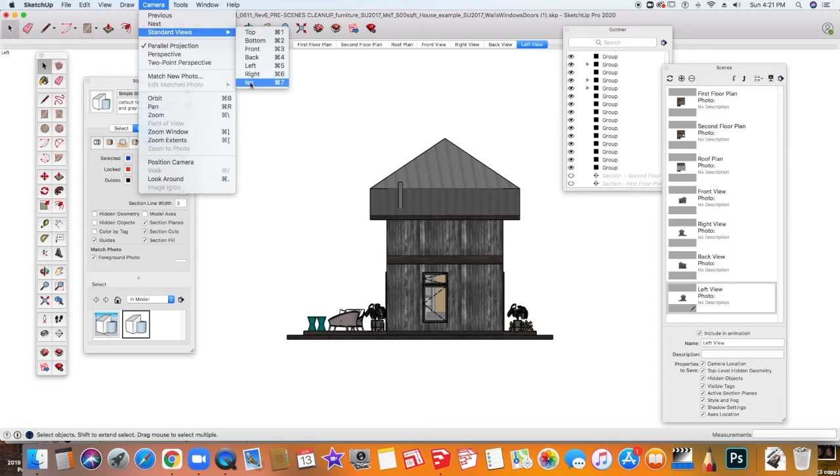Now that we've completed the roof plan, the 4 elevations, and our first and second floor plans, it's time to create some of the perspective views that we're going to be using. There'll be 2 3/4 perspective views and then also some interior pictures. So to start that, we're going to go back up to the camera and click on ISO.

That will put our model into an isometric view, which basically means there's no vanishing point. This is a stylistic feature used by architects sometimes. For our purposes, we're going to want to use perspective. So we're going to go up to the camera again and click perspective, and that'll probably look a little bit more normal.

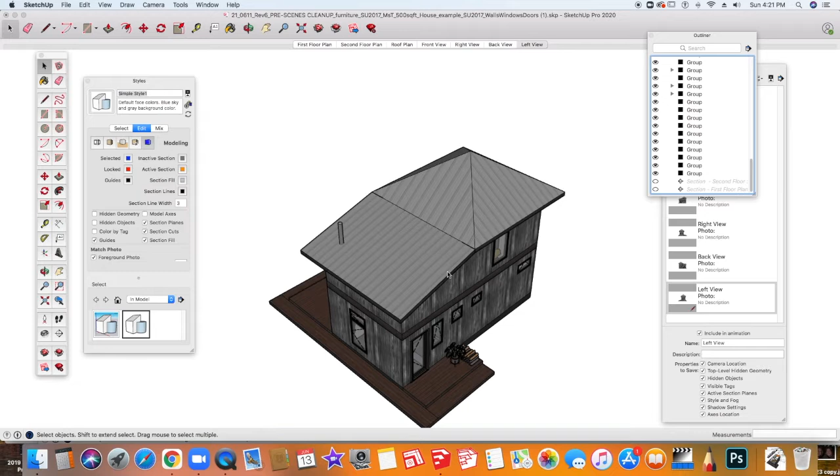We're going to want to have a 3/4 view, which means that we want to see 2 sides of the building. When you do this, you may want to do it as if you're standing in front of the house and approaching it. So I'm going to pick my front door and my left side, and set that scene up, and then click on the scenes window.

I'm going to make a new scene and call this '3/4 view front and left,' just so that I know what it is, and hit enter.

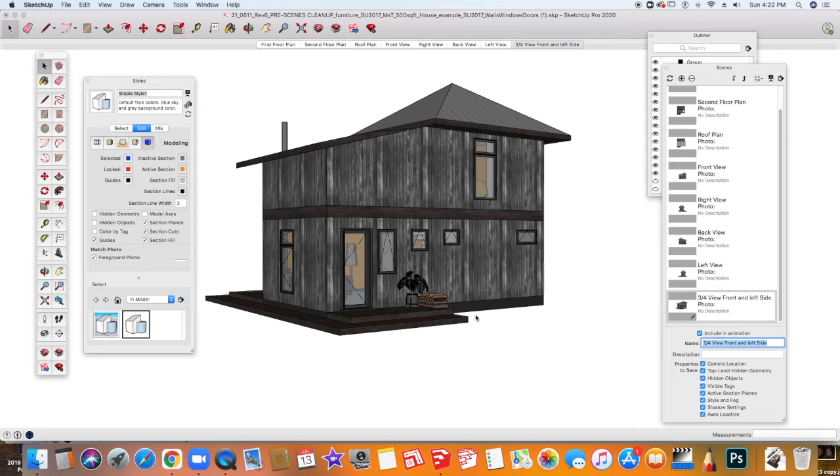Now with my orbit tool, I'm going to try to keep my eye level the same and just flip this over to the other side so that I see the back and the right side. This looks pretty good.

I might just slide that over a little bit, again looking up at the house so that when we toggle between these two scenes, it's not going to look too strange. Again, plus button, add a scene, and this time we'll call it 'back and right view.'

So we've got this set up. Now remember before when I said it would be good practice to have your first floor, second floor, and roof, as well as the windows, doors, and furniture, isolated on separate tags.

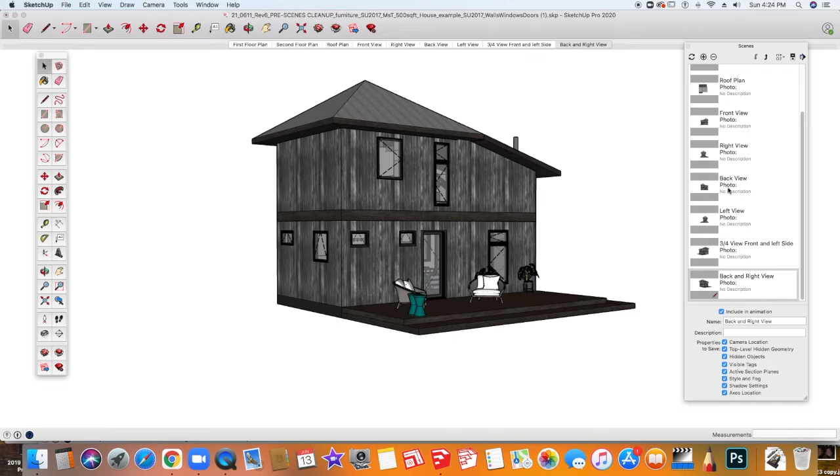This is why. Close the styles window for right now, and we can even close the outliner window, and just leave the scenes window open. What we're going to do now is turn on the tags window, and I want to start to create an idea of what the inside of the house is going to look like.

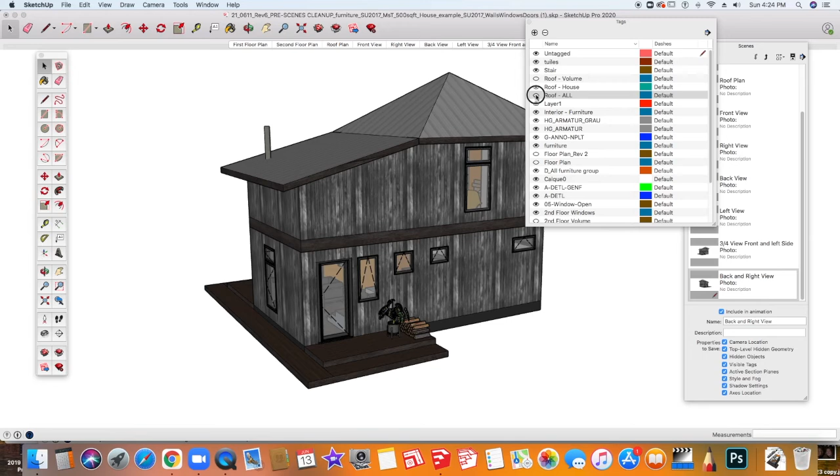So to do that, I'm going to navigate over here and turn off the second floor, the furniture on the second floor, and the windows on the second floor, as well as the roof. I'll turn off this roof-all layer, then go down to where I had all my second floor stuff, and click to turn off the windows, turn off the furniture, and turn off the walls.

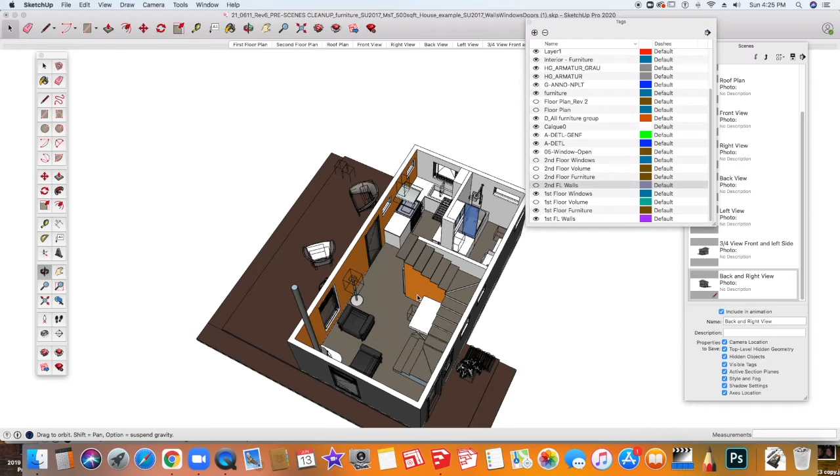The reason I'm doing this is so that I can actually look into the house and see where I want to place my figure. I'm going to look in here like this, click this little figure guy, put this person into the model, and click right here in the corner, and it brings me right into that perspective.

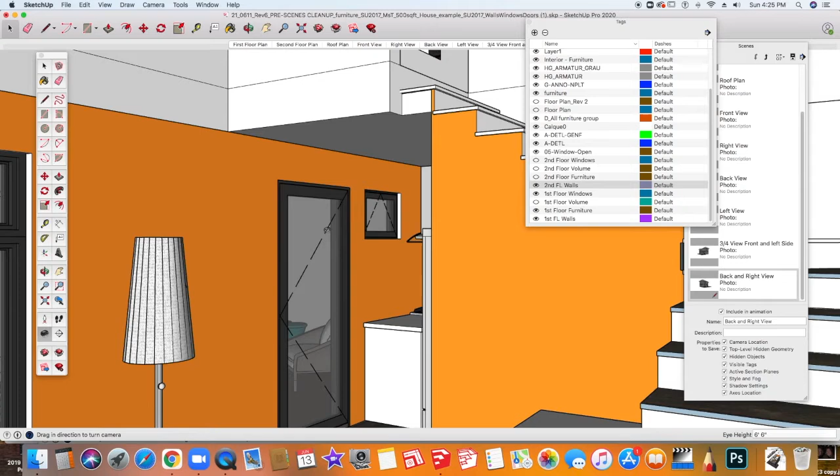Now obviously I'm looking up into space, so I need to turn on that second floor walls so I can see the top part of the house. The eyeball here, if you click and pull it to the right, it goes right, and if you pull it to the left, it goes left. This is the look around tool.

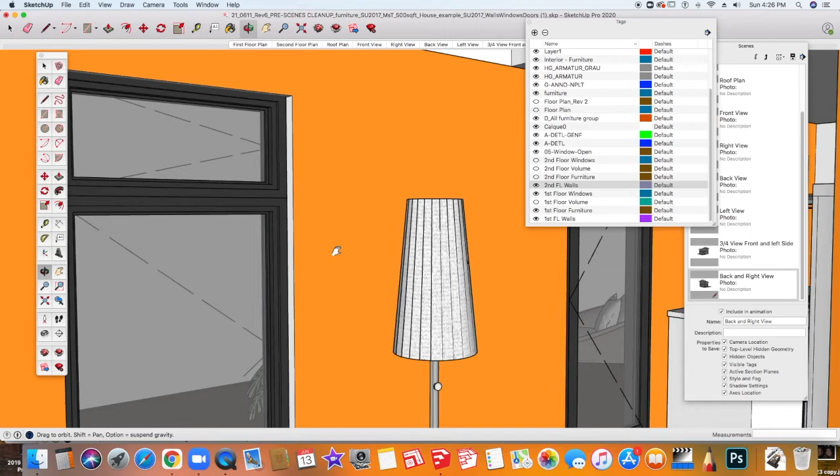You can also navigate similarly. You can see I just went outside the building by using the scroll wheel, so I'm going to set myself up here and zoom in a little bit. I can also navigate by holding the shift key and using the orbit and pan tools as well.

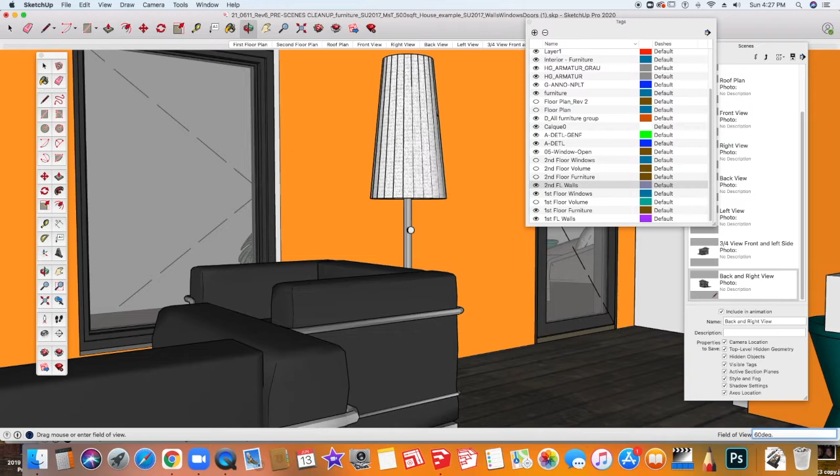Now you can see that this is very tight. Obviously this isn't going to give me the full 180-degree view you'd normally have walking into a house. So what I need to do is change my field of view. To do that, I'll go up to camera, then field of view. Remember, it defaults at 35 — you may want to try 60 or even 80.

Remember that the wider you get, the more exaggerated things are going to look, so it's kind of a fine line to decide what you really want to do. The other thing you'll have to pay attention to is the eye height, and I'll show you that in a minute.

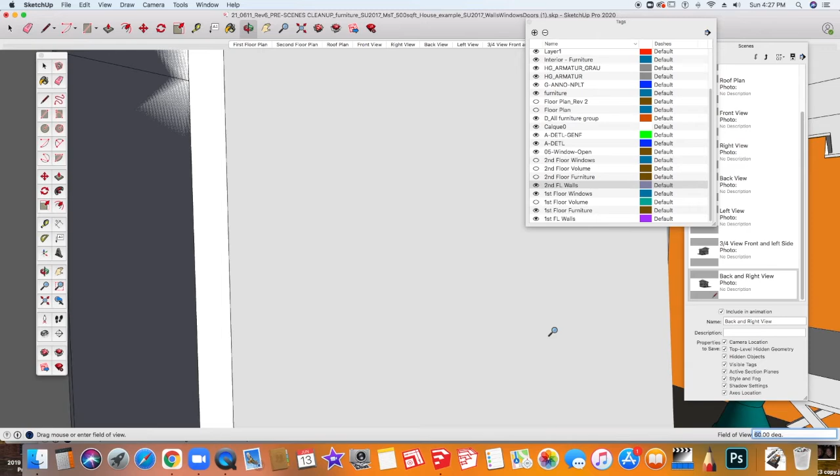So now when I zoom out, I'm not backing into the wall quite so much. This gives us a pretty good view. I'm just going to turn off the tags window here so we can see a little better, and you can see this gives us a better idea of what it would look like when we walk into the structure.

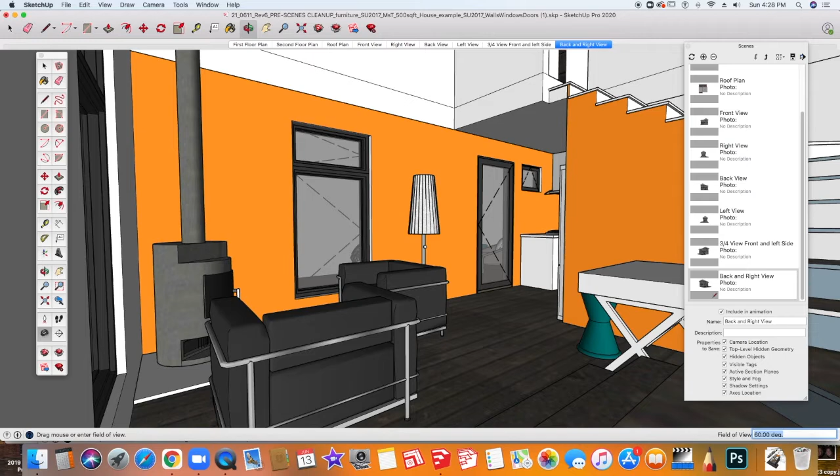So if I bring my eyeballs over here, I can click the eyeball and set the height. Here in the lower right, you can see this is 4'6", but you might want to do 6'2". Now when you're looking around, you can look up, you can look down, and set up your view however you'd like.

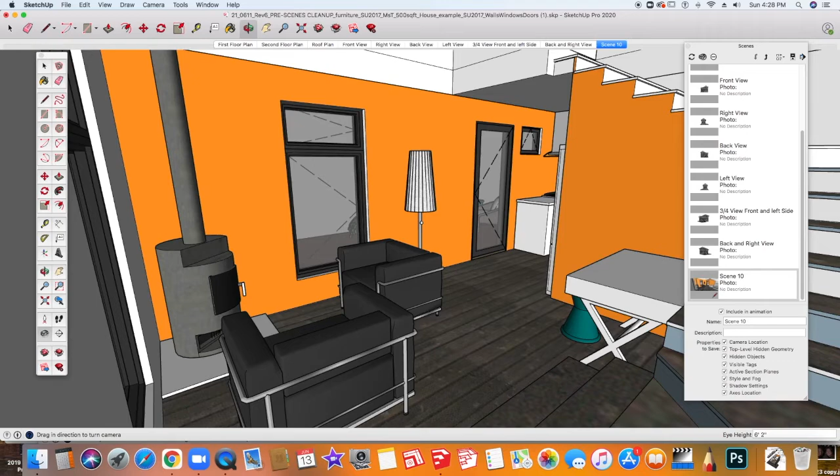I want to set this view up so it looks a little bit like I'm walking into the house. I'm going to set up this view, click the plus button, and call this one entrance, then click enter. You might want to think about doing scenes where there are good views of your house.

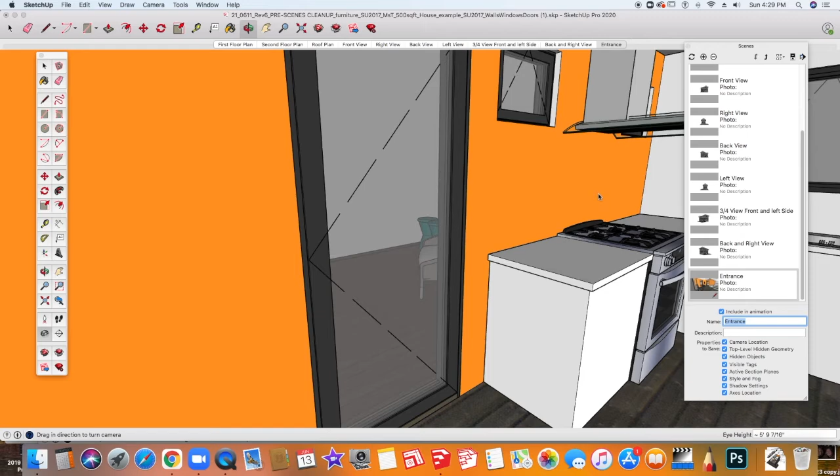I kind of like to do a kitchen view, so I'm going to navigate over here, move in a little bit, then click that eye tool, and go over to the right a little so I can see more of that kitchen area. Again, my eye height has changed, so every time you click it, it changes a bit. I'm going to do 6'2" again, just so we can see into that kitchen.

And then we've got the back door to the deck on the back. I'm going to click that, go back, and click new scene, and I'm going to call this one kitchen.

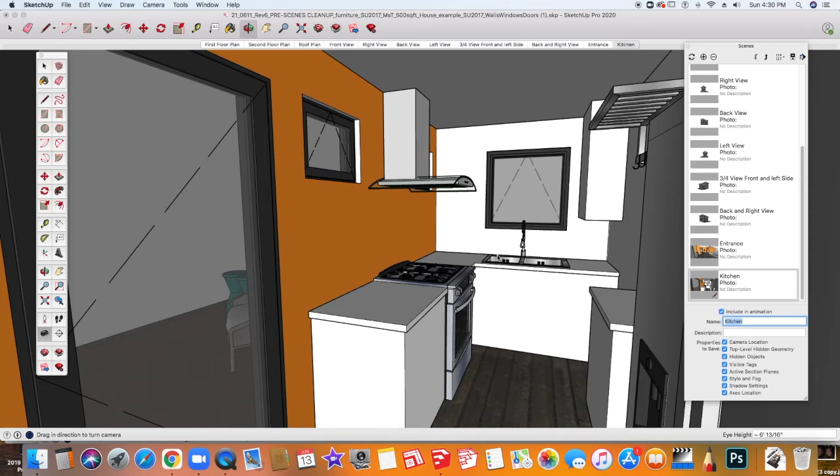Now I might zoom in a little more and get something with the bathroom. With this example, I found it better to go up into this corner here and then swing around. Obviously these are not huge spaces, but we just want to see enough. I'm going to create another scene for the bathroom.

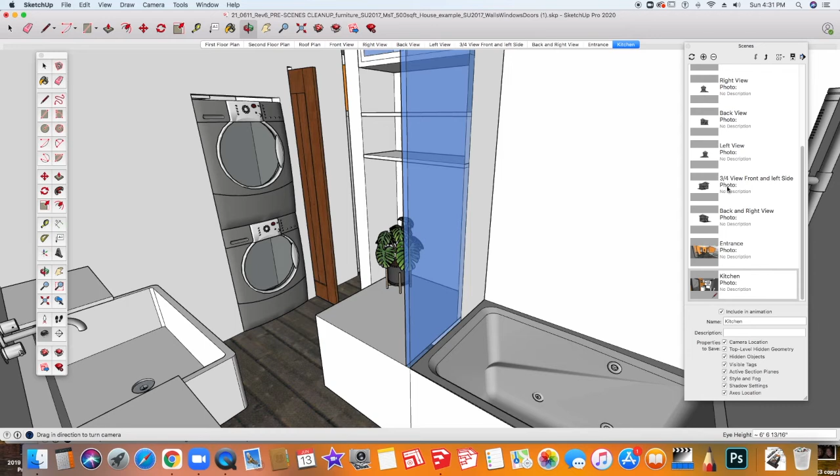And then this scene will be looking back at the entrance. So I'm going to call this living room 1.

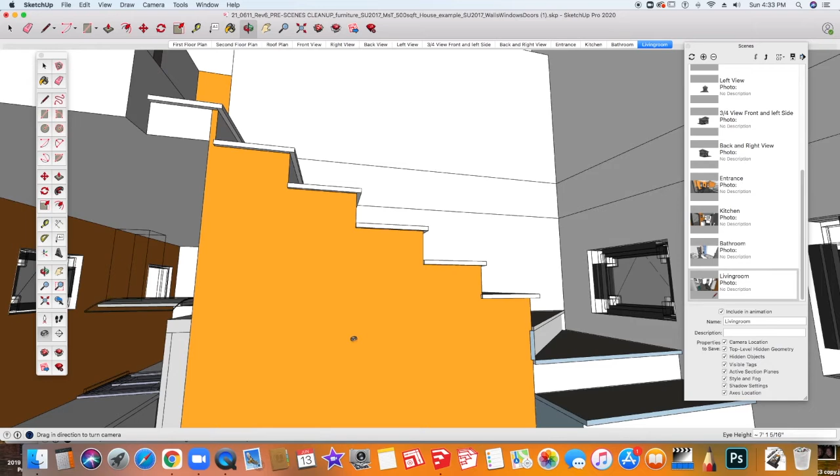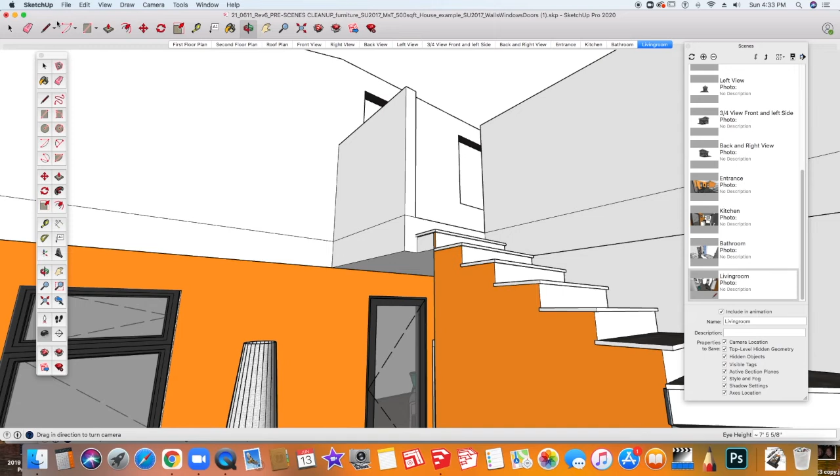Again, we might have to turn things on because I don't have the roof on there, so I need to add that again. I'm going to go back to my tags window and turn on the roof. I'm going to add the second floor windows and the furniture so I can look up in there, and I'm also going to turn on the roof. Now we have a much better feel of what it would be like.

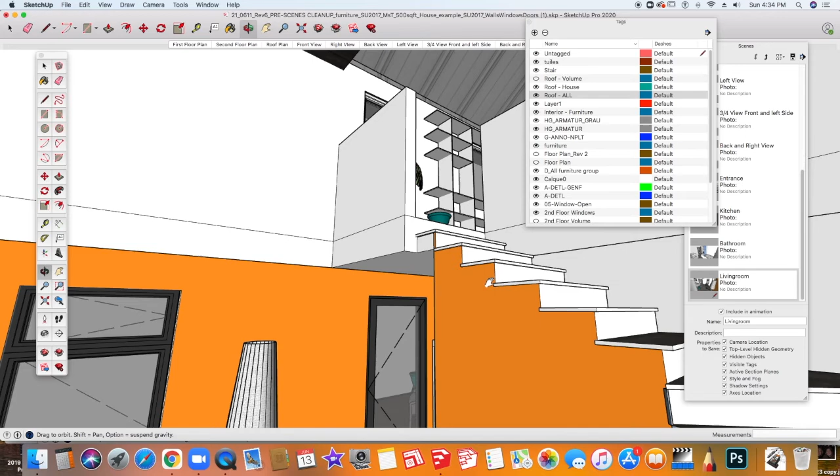Now I'm standing on the first landing here, looking up, or we could do it from the top. I could also try a field of view that's a little larger as well. Let me go back down here and see where we are.

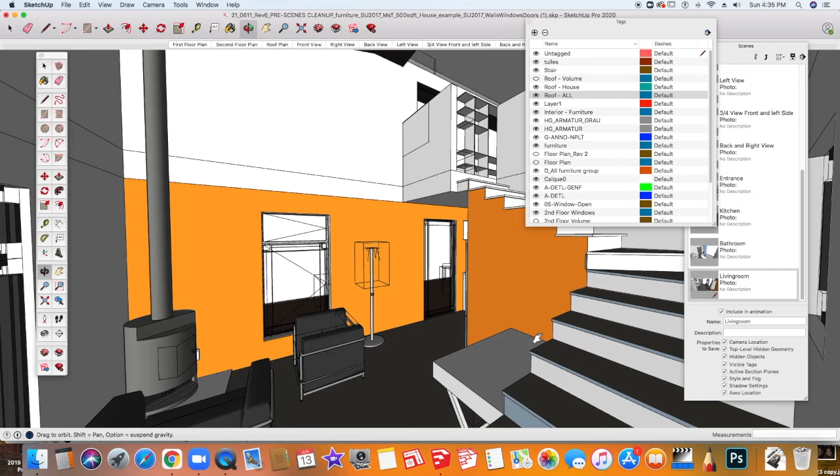What happens if I turn it to 80? Things tend to get a little more exaggerated at 80, but it does give us a good idea of what it might look like. We can make a scene with that, and then I'm going to zoom up here and try to put myself at a realistic eye level.

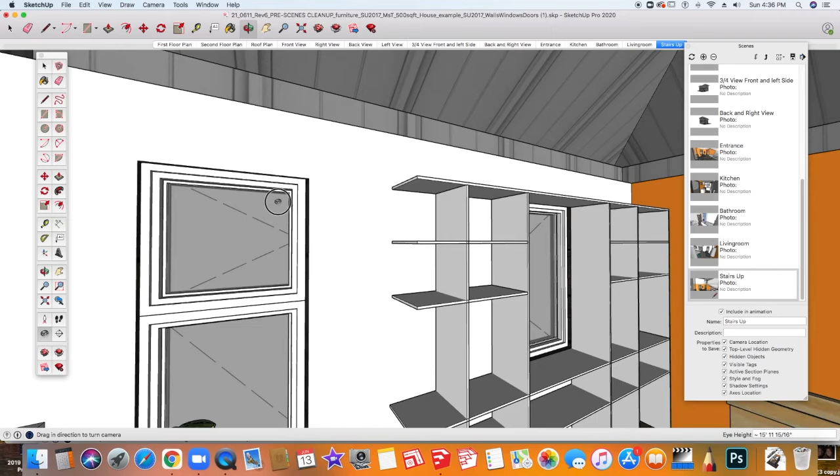Then I'm going to do the look around, and I'm going to go this direction and look back down, because that is a big feature of my house. I kind of like that right there.

You can see how the roof structure or the roof texture is here. If I was doing this with a high amount of detail, I would definitely remove that and change it to a white color, or whatever color I would want that to be painted.

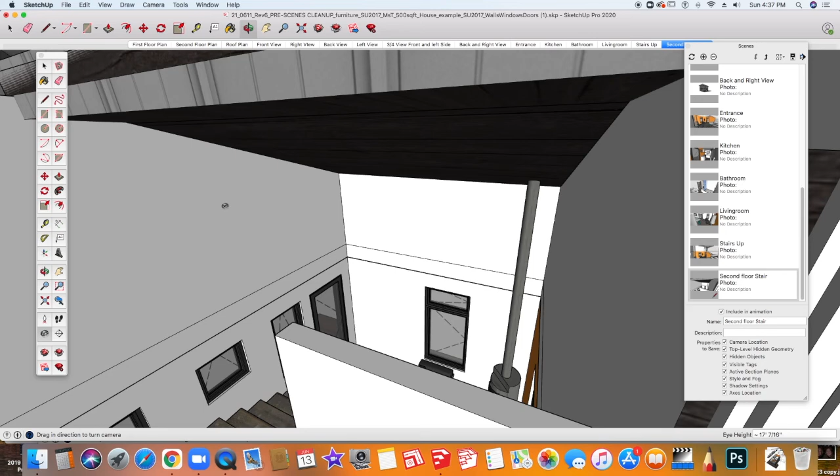And then I'm going to use my eyeball again and get a sense for what the bedroom looks like. Even here, I might change my field of view again, since we do want this to look fairly realistic. I want to do the eyeball height, go back to our standard 6'2", and now I have a good view of the bedroom.

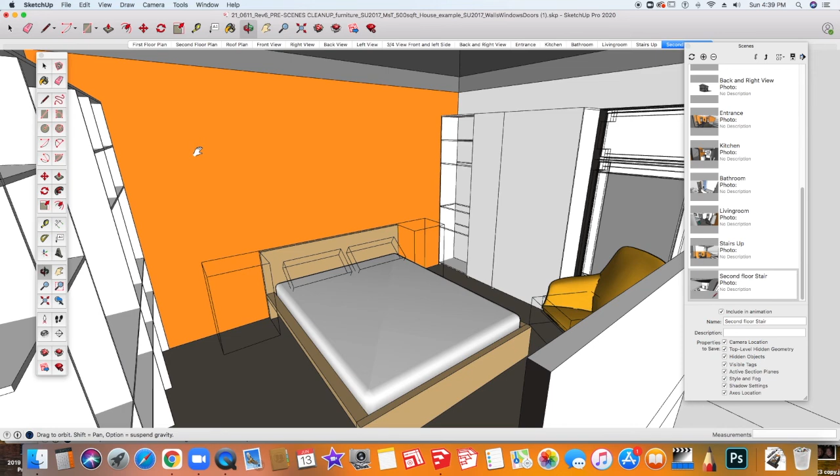So that's going to be my last one, and this is the bedroom.